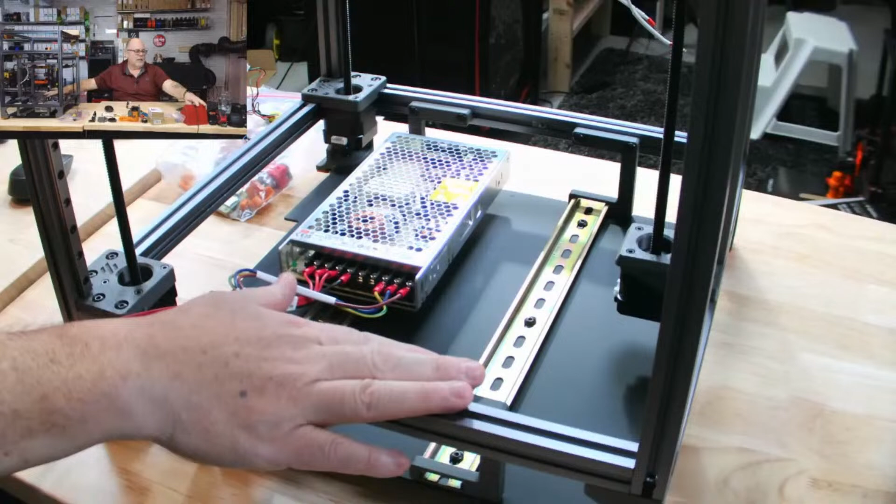Now we have an overhead bench camera that I can actually just reach up and zoom in on a little bit, so this will give us a little better view of what's going on over here. So how this is working is the camera that's up here used to be the camera that's there. The camera that's there used to be the camera that is here. The only camera I haven't changed is my floor camera, which is pointing down at the base of the electronics on the Trident. So there we go.

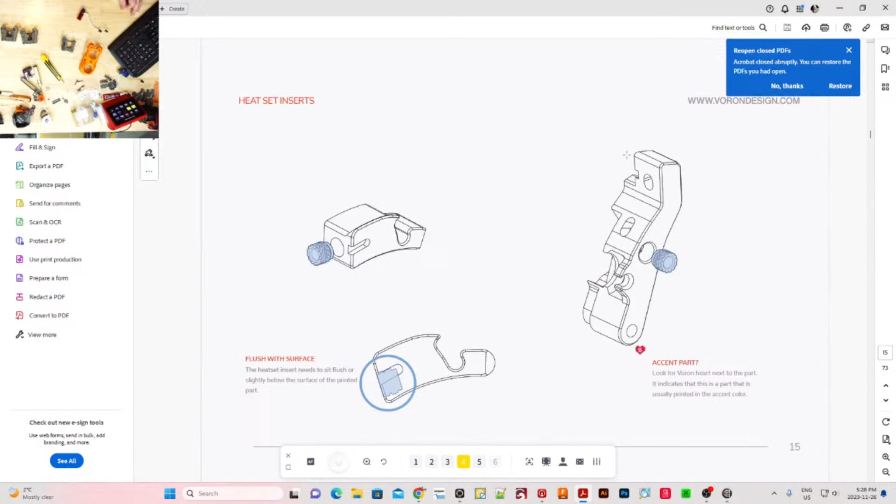So we do have the Stealth Burner. We're going to skip by because we're not doing the Clockwork at all on this. So we're skipping right down to the part where they start talking about the hot end. We are at this stage where we're going to insert those 4 heat set inserts. This is instructions for the Revo, and we're just going to follow along with these as we go.

But now for the easy part, getting this thing warmed up. I don't know how this overhead camera will work showing the heat set inserts.

So these, I don't like these ones. I have 2 different kinds of heat set inserts here, a kind I like and a kind I don't like. I'm hoping I have some of the other ones left. Let's see, are these the right ones? These look like the right ones. Yes, they are. A kind I like and a kind I don't like.

What is a Tri-Zero? Stephen Machado, a Tri-Zero is the Voron 0.1 or 0.2. I'm doing a 0.1 to 0.2 conversion. A Tri-Zero is basically giving it the same bed mechanism as the Trident. You're going to have three Z motors lifting your bed on a Tri-Zero, as opposed to the single one that's on it right now, the single Z.

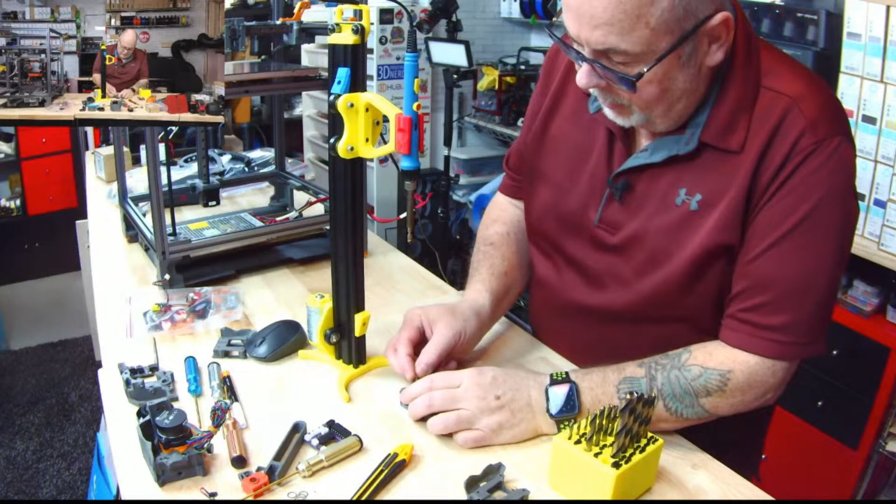You don't see much on that overhead here. So if I were to go like this and angle this down, that's a little better there. That way you can witness if I actually burn myself.

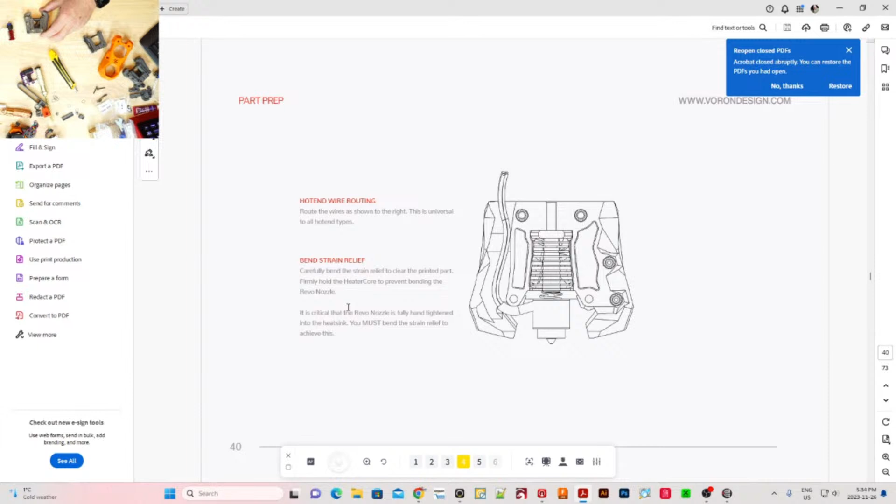And then we put the cap on and screw it in, and then we screw the 4 mounting screws on the top. That's provided we actually have the mounting screws. Okay, so let's go ahead and do this one. Sorry if I'm switching cameras wrong, it's all sort of just... This is all put together and it's all in the heatsink and everything what they want here for a fact.

So what we're going to do is we're going to put it in here and we're going to route the wires up this little groove on the side here and then up this way. Let's bring that little, there we go. So this is going to go in here like so, and then we run the wires just like that. Then we take our other piece.

Is that the right one? Which is the right one? This is the right one. And it covers that just like that.

Oh, that did an ugly job printing that. Okay, that's okay, I won't hold it against it. Little overhang there that the Bambu didn't do. I should have slowed it down for these layers here. So, okay, so there we are. There's the in, like so.

And then we need to take M3x8s. They are also M3x8s. You should be good, that's good. I just need to see it.

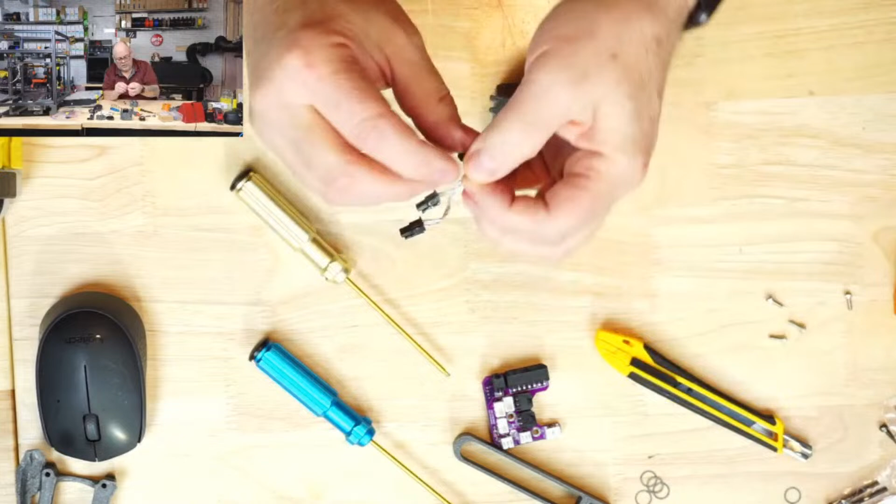Now, ideally, these should be the right size screws to go into the Revo. And I don't think they are. Or we're not lined up. We are lined up, but are these too big or too small? Do these just use basic M3s? Let's just see. Let's see. It does too, it doesn't need these tiny ones.

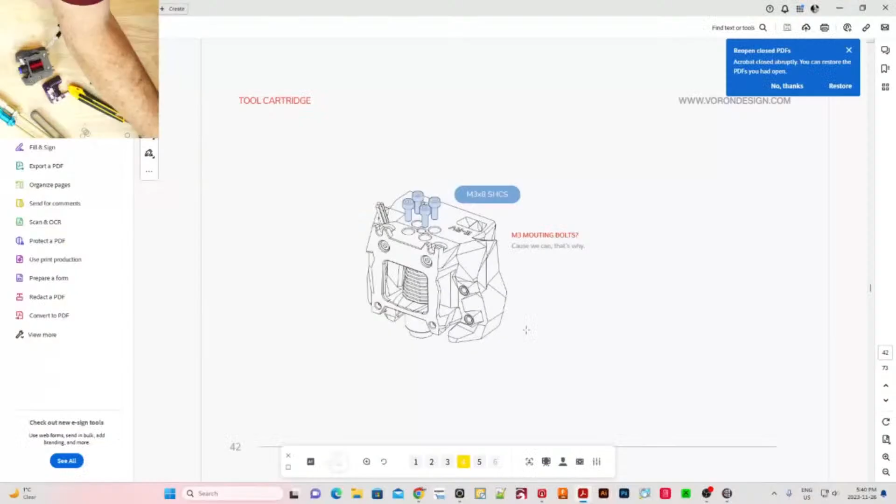Okay, PTFE tube, I got to cut some. We need it to stick out 11. Now, my question is, is this going to be the same for the Galileo 2? It should be, I would imagine it should be. Okay, so we want it to stick out 11 millimeters. Does it say how long for the Clockwork 2?

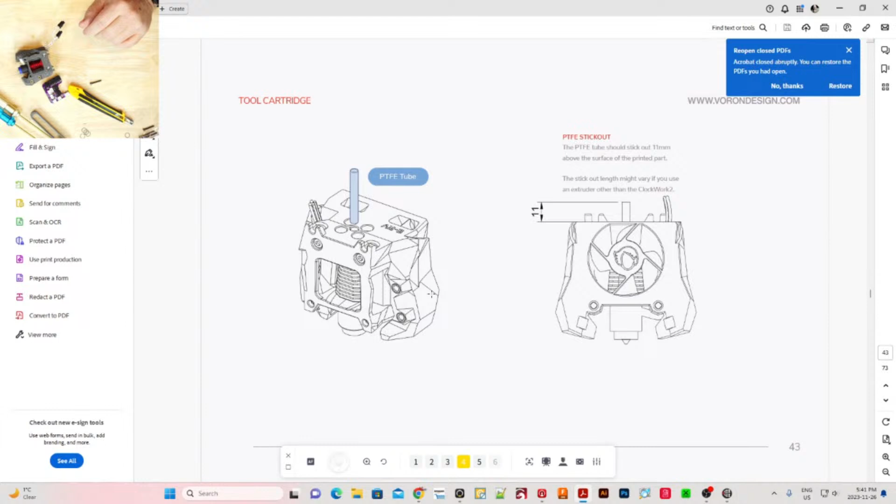It may vary if you use an extruder other than the Clockwork 2, which we are. We're using Galileo 2. Let's go ahead and see how far it's going to stick into the Galileo, and we'll just do the math, and then we'll get back to this part.

Okay, so let's find some PTFE tube, which I believe I have a whole bunch right over here. I saw some yesterday. There's a piece, I see some. Come on, don't be shy. There it is, nice straight piece. And I have no clue, or do I? I do have my PTFE cutter right here. I was gonna say I have no clue where my cutter is, but I found it.

Okay, let's see how far in. Let's get a flat end here if we can. Let's just see if I can. That's nice and flat. See how far in we shove this into the Galileo.

Although we have a little bit of plastic in the way there. I got to drill this out a little bit. Where is my hand tool? There's my hand tool. So put this in here.

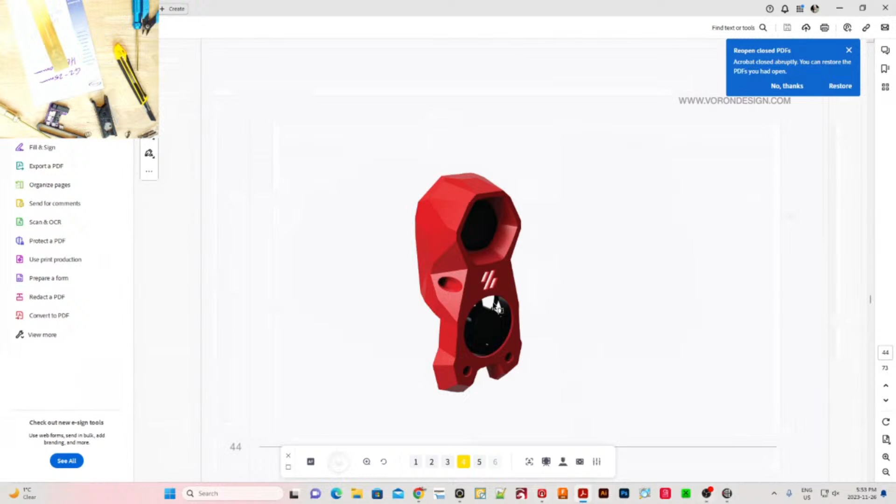Remove support. Oh, all these fun parts right here. Yeah, I think I printed all these things. Let's see. Oh, I don't think I printed the clear parts, but that's okay. I can add those. I think I might actually have the clear lens somewhere.

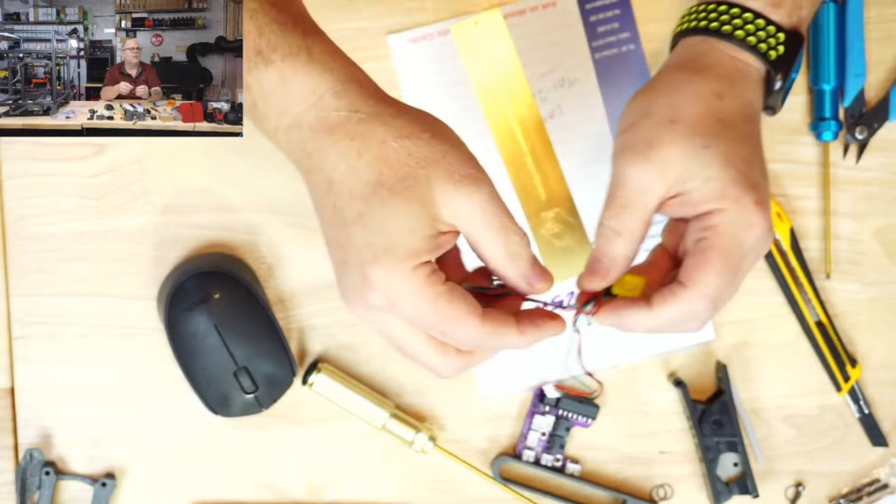Okay, but this is the old one. Let's move this aside. This is the old one. So I got to pop this LED out of here if I can without breaking it.

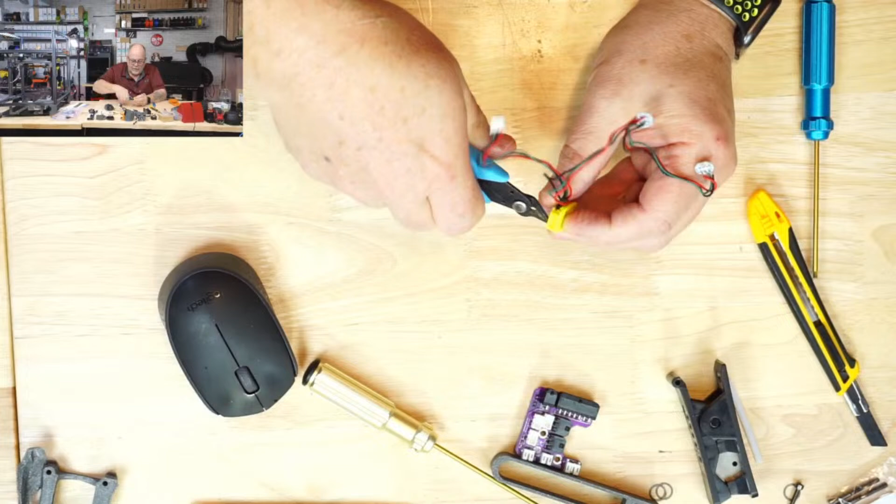Actually, I don't care about breaking the yellow piece, so let's just go ahead and sort of cut this off, because it's a tight fit. There we go.

Really tight fit. That's what she said. Yeah, that's what she said.

I think I got it. I don't want to cut a wire or kill the LED.

Pretty sure I didn't glue that in there. Oh, I just broke a wire. Of course, I just broke a wire. There we go. I just broke the black wire.

Dang, it means I got to solder. Well, at least I got the solder on there. That's okay. I just have to fix that black wire up.

It's called a make work project. Yeah. Make work. Gotta love it, right?

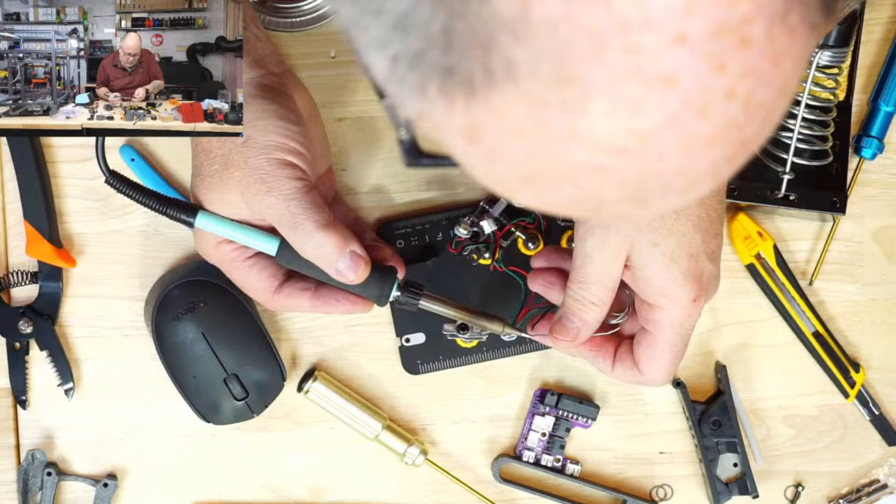At least I see where the black goes. Let's tin that wire a little bit. And let's try and get this to go.

Got it. How does it look? It looks pretty good. Will that focus on that? Autofocus.

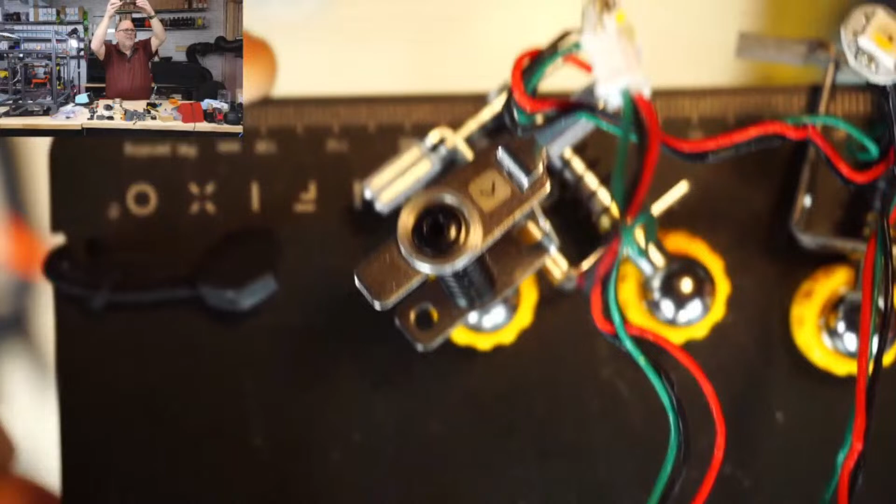Where's the piece that I soldered? Right there, right there. Just soldered that black wire in place. Come on, focus again. Focus.

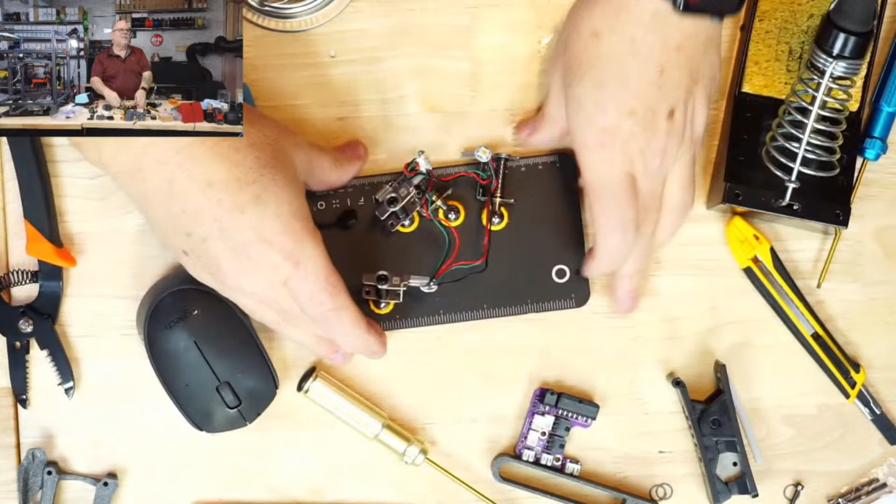There we go, don't worry DWIT, it will be a singe. I mean, a cinch. Ah, good one, Andrew. Where would we be without your humor?

I think we're all okay. The rest of the wires are all fine now. But we're going to leave it. We'll turn the soldering iron off, but we will leave it handy because we all know me.

We'll leave it handy. If you ain't handy, what are you? Something like that, whatever Red Green says. And for all you Americans, you probably don't know who Red Green is.

Okay, so we have our carrier here. I didn't print the clear piece. That's what I didn't print.

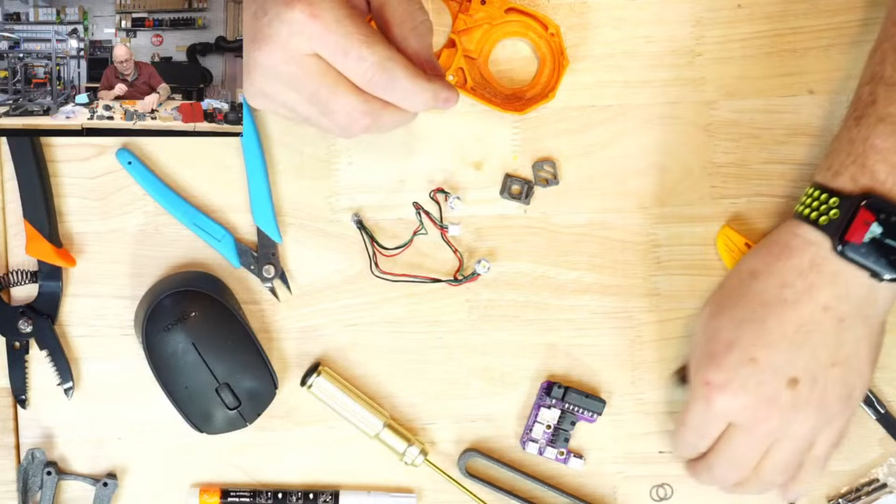Okay, well, I don't know. Maybe we'll do it later.

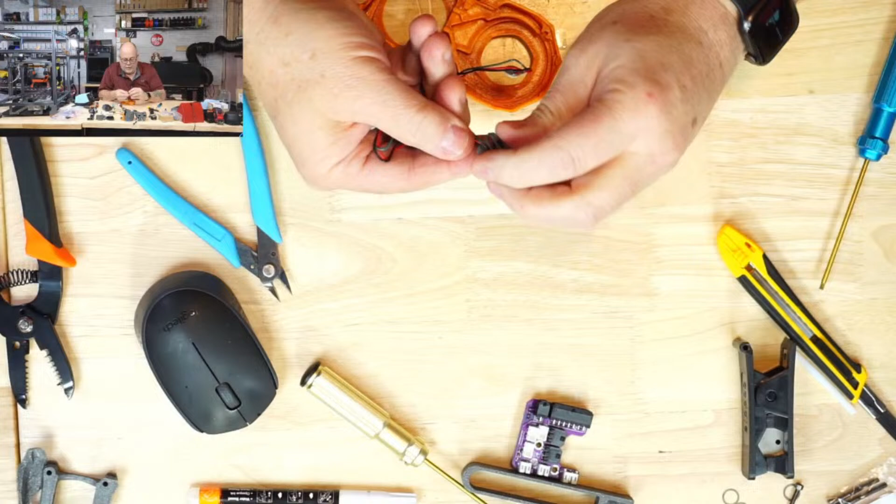That slides in there like so. And we have our carrier and our clear piece is not on there. So I wonder if I have the clear piece from the previous build that I could steal, or did I toss it?

Okay, we'll worry about that in a minute. Let's work on this for now.

Possum Lodge. Possum Lodge, yes. Yes, it is snapshot. That is correct.

Okay. Remove the support, which is, oh, I see. Okay, so the support they want me to remove is this one right here. Right there.

So that we can run wires down the sides of these. There we go. And then the rest of these just snap into place and break as usual. I can't really do this without that clear piece. I can, I'll just take it apart later and build it again if needed. Let's just see how well this is going to sit in here. I have no problem taking it apart, even if I have to print another piece.

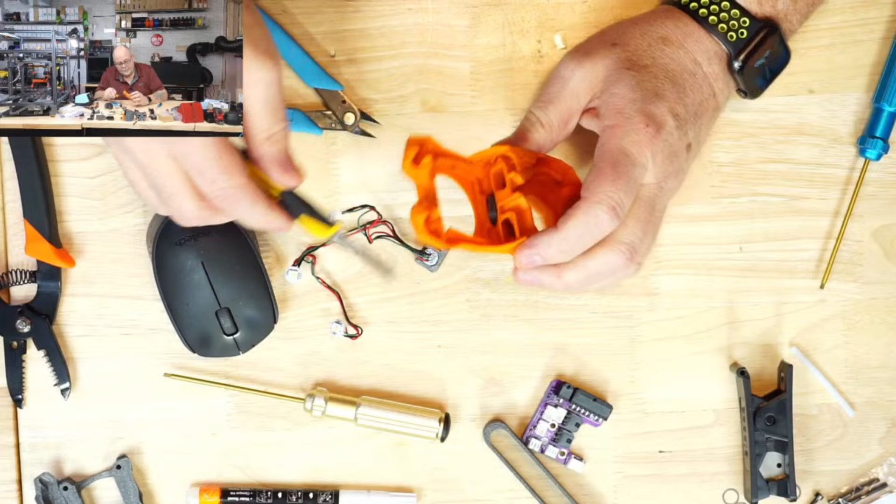Wonder if I can just, for now, put this in. Yeah, and then that'll pop out after, just because I didn't print the clear piece in here yet, and I don't want that to slow my build down. Yes, I'll have to take this apart later to fix it, but big deal. So I don't have the fancy looking lights. It's not the end of the world.

Food container plastic for it. Oh, that would work too. If the women don't find you handsome, they should at least find you handy. Yes. It's rare to get such entertainment.

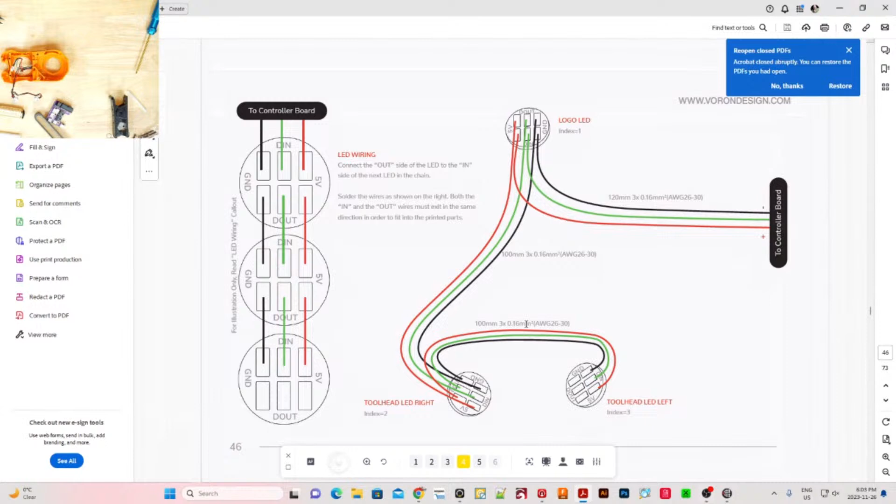It is. Okay, so where we're at is we are at this stage right here. We've already soldered all these because these came off the old one. So we've thrown this in here. We're missing this little clear piece. I can always do that later.

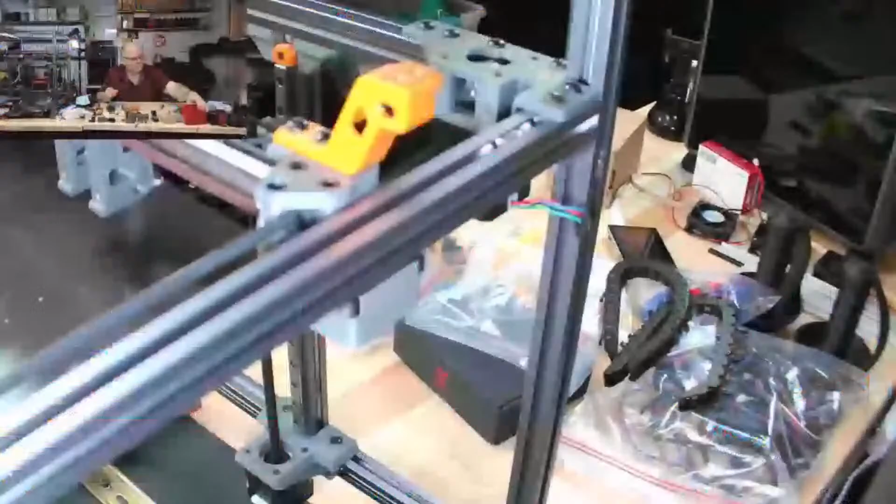Now we're going to load the tool head left and the tool head right. This is just all the wiring routing that we're going to wire up to the top. Okay. Oops, wrong one. Okay, so we got this in. We are going to run tool head left and tool head right. So I believe it is this way over here.

So this plug is going to run. Oops, I got a little support here I got to cut out. There we go. So the power plug is going to run from here through here, up around here, under here, and under the clip. There we go. And then we're going to run—

The LED wires are going to run basically down along here. One LED is going to clip in here. We're going to run the wires along the front, and then the other LED is going to clip in the side. So this could take a little bit of work. For a big-handed guy like me, it takes a little bit of patience and perseverance to get these wires pushed in, and a little help from some tools. Although after doing this a few times, it does become a little bit easier.

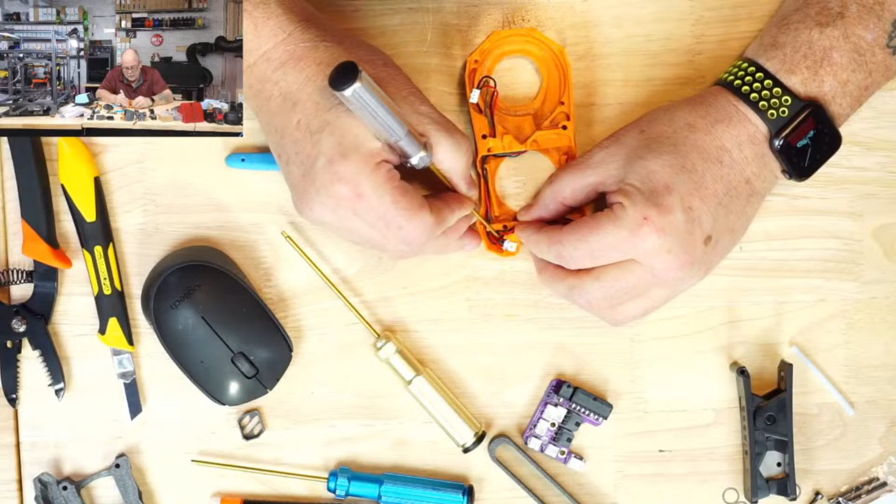There we are, I use a pointy device, but I want to make sure... that one's too thick, that's too thick. But I just want to make sure I don't pinch, bend, or—well, pinching's okay, bending's okay—I don't want to pinch or pierce the wires at all. Okay, we'll tuck these in.

Okay, and we'll route these wires through the wire routing channel. Sounds like a reality channel, right? The wire routing channel. There we go. Black, green, red, and then the wires are a bit long, but I can just tuck them all in underneath here, hopefully.

I'm just trying not to break any solder joints like I did earlier. I do not want to have to solder another wire at this point in time. There we go. I think I successfully did that without breaking any wires.

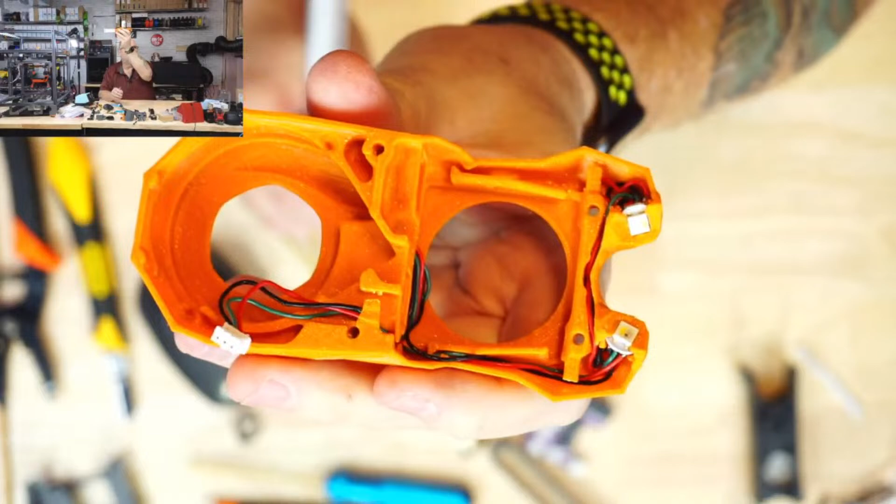Those channels are great, it's great the way they built these channels in. It just takes patience to run the wires and everything down there, and tuck the wires in everywhere so that we don't have trouble when we go to put the hot end on. The only thing is we don't have a clear lens in here, but I'm not worried about that at this point in time. I can fix that later.

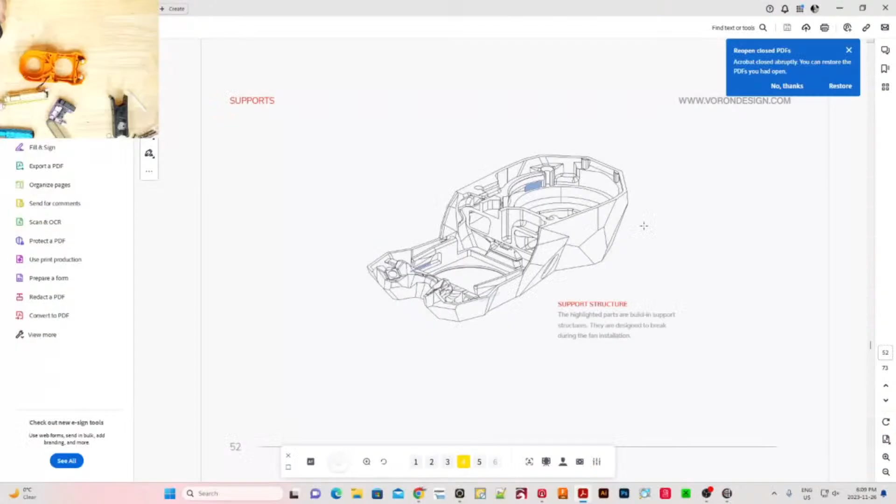LEDs are all in place. So let's go ahead and, where's my mouse? There's my mouse. And we're under this page. The highlighted parts are built-in support structures. They are designed to break during the fan installation. So we're going to install this fan, rotate the fan so the wires exit on the top as the air is pushed inwards.

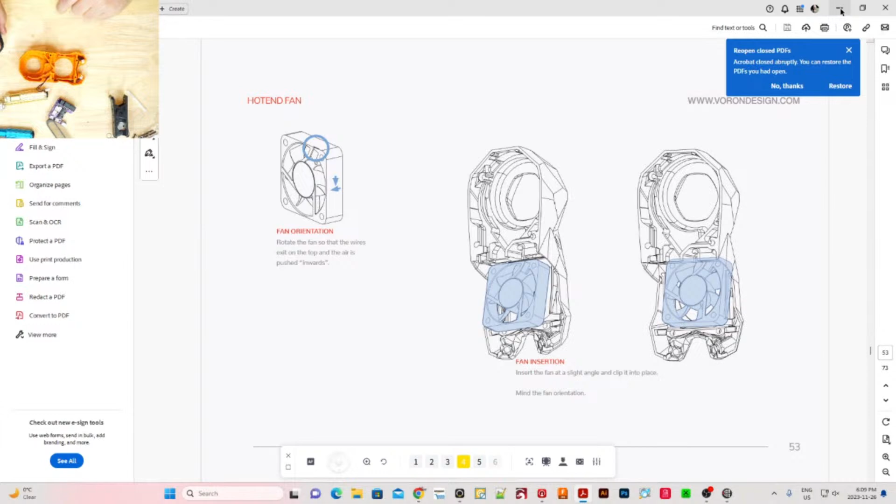Now the fan wires are going to go. Yeah, I'm pretty sure I can figure this out. I think the fan for this, and I couldn't find the fan, but I think I found it, is this one here. I think this is the fan we're looking for right here for the bottom one. Although something tells me it's not, because it was wired.

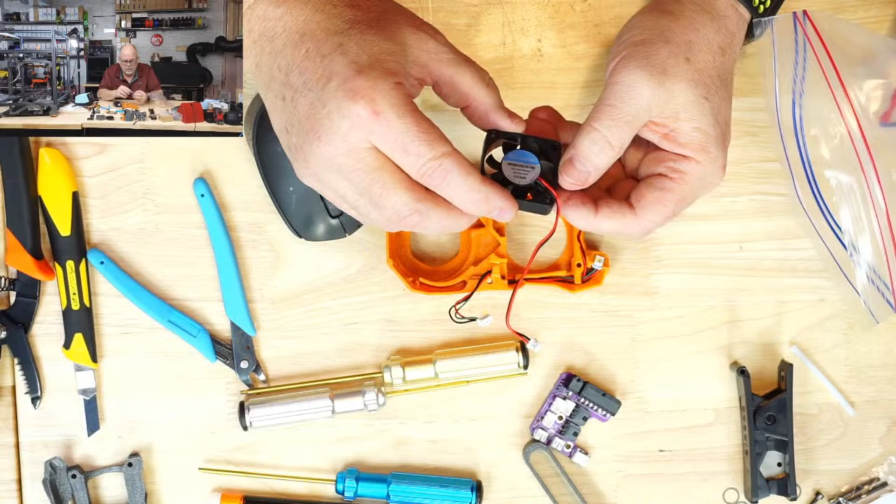This is a 24 volt, which is fine. 24 volt 4010, it's the only one I could find from my old hot end. This, I know this is the top fan, which is no problem. This is definitely the upper one. Yeah, these are right, these are definitely correct.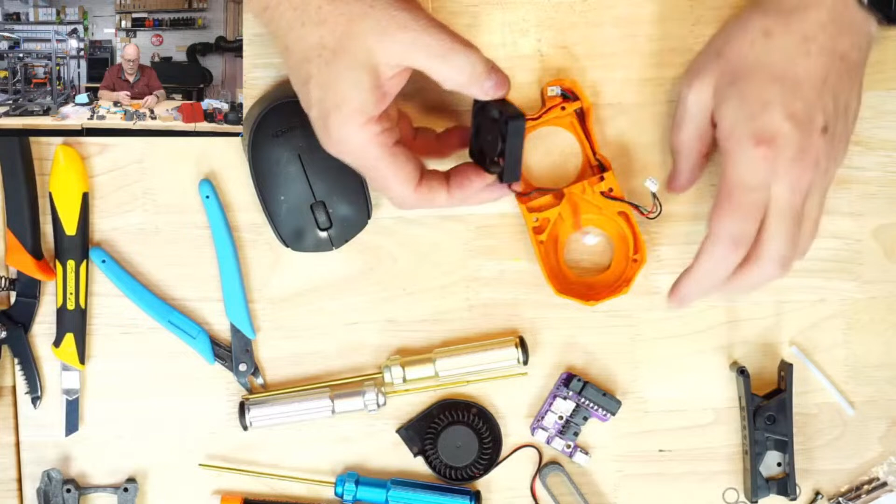So we want the wires coming out this side. The fan is blowing in, so the wires go this way. We want the label of the fan showing. We want the fan blowing in towards the hot end. No, we want the label to be inside, like this. I believe that's the way it is, where the label is, the airflow is towards you where the label is, if I'm not mistaken. Anybody correct me on that? Airflow is this way, comes out with the label.

You bought 37 rolls of filament from Bambu. Oh yeah, that's a great sale, Joe, for sure. That was a great sale they had there.

So I want the wiring coming over this way because it's going to come up through here. So we're going to push this in, like so. I'm positive that the label is the airflow, so that we have just a black fan showing like this. Yeah, because as the fan turns, it's pushing air in.

That makes sense, that makes sense. Yes, thank you, Randy, for sure. Label is in, yeah, I thought so. I always get that confused, the airflow, but yeah, I always remember label. The label blows is what I kind of remind myself.

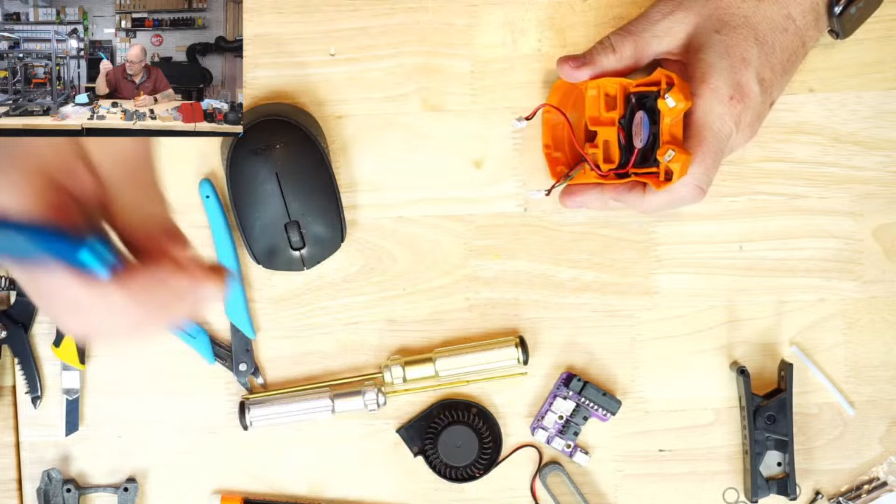Where's my pusher, wire pusher inner? So there we go, feed that over, and under this clip, and there's the fan. I don't think I had the breakout board in this with the plug thing, so I'm not gonna worry about that for this build. Because I honestly don't think that the Galileo 2 has the room, let me actually open this up.

I don't think the Galileo 2 has the room, or does it? Oh yeah, it does have the room for the board. I don't know, where's my board? Where's the one board that I was using? It was this one. And this went, yeah, I don't think this is designed for it. Or is it? Oh, that might be designed to take this board. So maybe I'll just do that. Yeah, okay, so putting this board in, I just have to remove this screw and put the other one in.

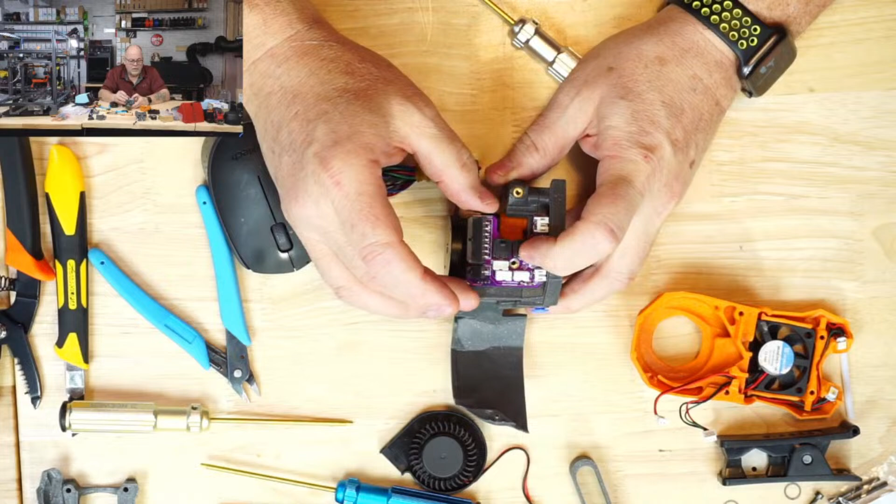Yeah, maybe I will use this board. Actually, no, that's not, I'm thinking of this one. This is the one I'm thinking of here. So where this would go in here, however that goes in here, and then this guy mounts on here, like so. I wonder if that would work with this. And then that way, when we unplug the... No, I think I'm just going to go the old-fashioned way for now, because that means I'd have to unplug and solder my fan wires to this guy.

So I think I'll just go the old-fashioned way, and we'll go ahead and use the board that came out of it, which was this guy here, where we're just plugging all our fans in. But I just got to remember what is what: part cooling fan, hot end fan, and then this is going to be the LEDs. Yeah, okay, I think that's what we'll do.

The board fits, that's why it took so long to design. Oh, I see, okay. Oh, the other screw comes out, it was just designed to hold the thing temporarily. Oh, okay, I see, I was wondering why that was in there. So yeah, this other screw right here comes out, and then that's where the board is going to sit right here. That makes sense.

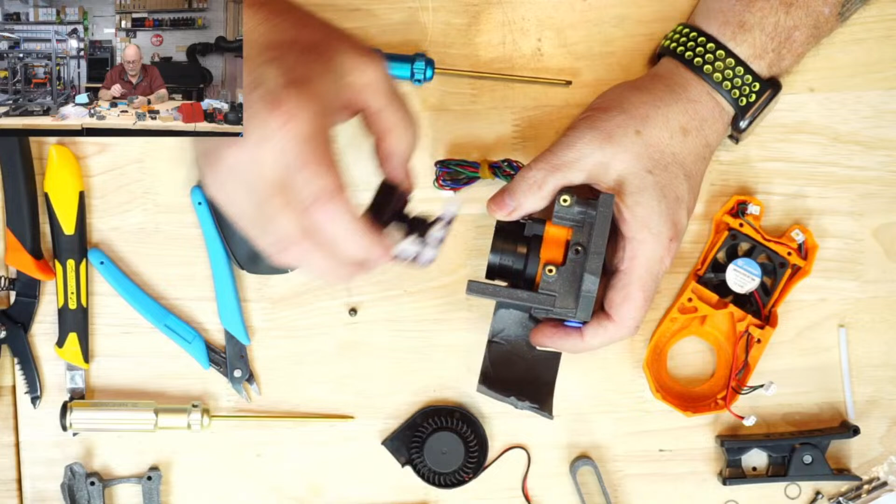So we'll keep that screw, we'll use an M3x8 here. And so this board can come on and go like so. Okay, we just need to remember that hot end fan and part cooling fan is the top one. I get the two mixed up. So we can put this one back in.

Okay, do I need a spacer under that one? No, I should be okay. Oh, they've designed that nicely. It's a tight fit to put the plugs in here, but still, it should work.

Looks like it will take the Revo connectors too. I believe it does, down here and here, the two Revo connectors. Let's see. Yes, it does. This takes the Revo connectors here and here. It's hard to see them in the camera, but they're the black plugs here.

I need to figure out which is hot end, which is the thermistor and which is the heater on that. Okay, so we have thermistor and heater, I can read them right here. And then the other ones, we have a probe, so that's going to be for our probe. And then we have our LED and then our bundle, our bundle is going to go here. Okay, I think we're good.

I'm winging this without instructions a lot for some of the electrics, but going from a little bit of history of doing this, I guess.

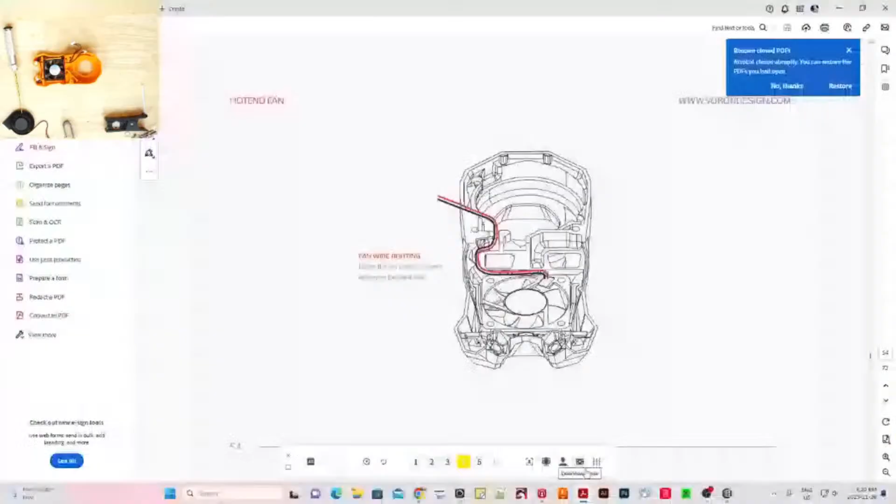Next step. We've done that, we've done all that. And we're going to use those M3x6s. Okay, just to put that fan in. Okay, so we're getting to a point now where we can do stuff.

So this one goes in like so. This snaps in here, like that. Okay, turns freely. And then we're going to use our, what just fell?

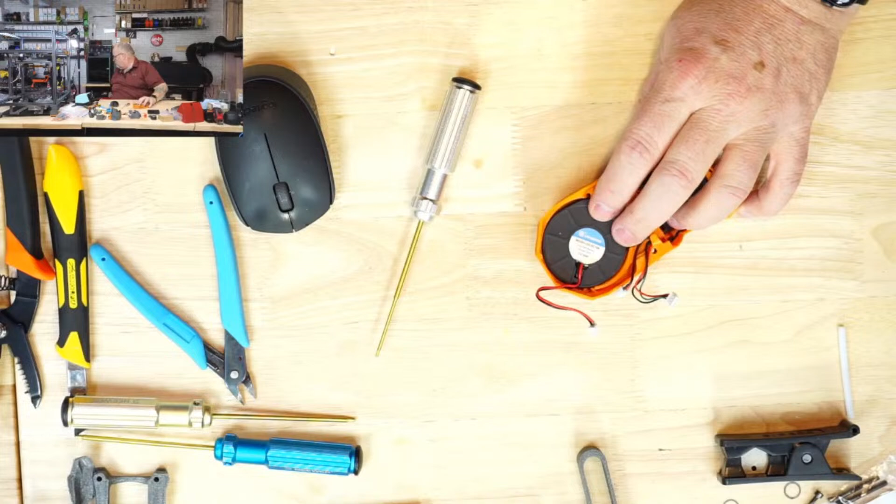Oh, just my paper towel. Then we have a couple M3x6s here somewhere, right here. Let's secure that fan in place.

Do not spindle, fold, or mutilate. Spend, bend, fold, or mutilate. Bend, fold, or mutilate.

Okay, where's our sixes? There's our, and these just screw into thread into the plastic, and these are just to hold the fan in place. There we go.

Okay. Okie doke. Stealthburner, check.

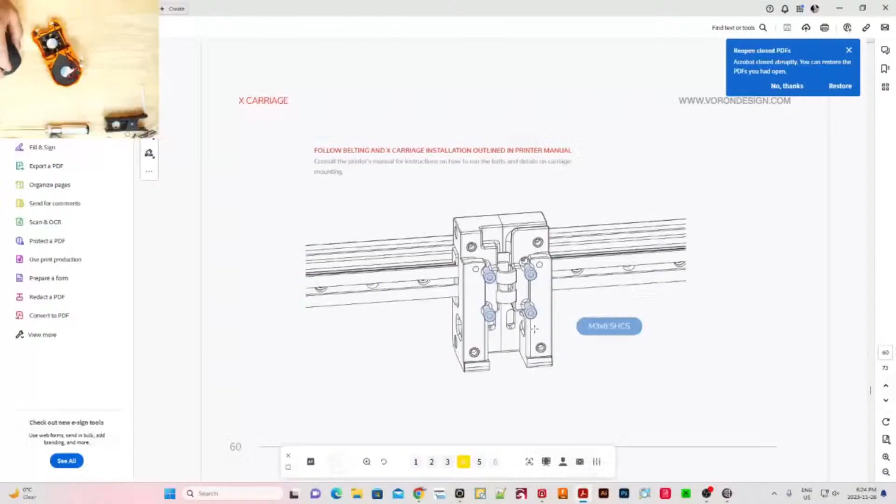Okay, we've basically done the rest of it. We've already got that mounted to the X carriage. We're not worrying about that probe for now. We can actually assemble this. We're going to be putting a... I don't have my ADXL. Do I have an ADXL for this? That's what I got to figure out.

I'm going to be putting, I think, a clicky probe on this. I haven't decided. I'm thinking of ordering the beacon, but I really haven't decided as far as what kind of probe I want to put on this thing yet. So, yeah.

You're being foolish. You have thermal filament that gets blue when it warms up to print your parts. Oh, very cool. Why would that be foolish? That sounds kind of cool.

Okay, so we are gonna. I'm not gonna worry about the probe at this point in time. Although I do have the clicky probe, but I gotta reprint the parts for it because they're in the wrong color. I don't even know where I put them. Is this it here? Yeah, this is the clicky probe here. But they are printed in the incorrect colors.

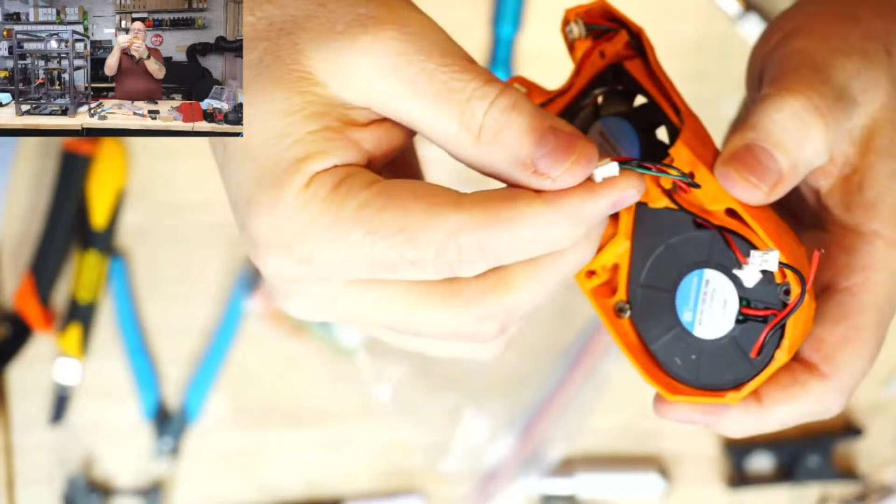So of course I've got a broken wire right here that I've got to fix, and this one here. Let's make sure the other ones aren't. Yeah, they're okay. Gotta fix a broken wire. Good thing this is nice and long because I got lots of wire to play with here.

Do I have any more of these plugs? That just came right out, just came right uncrimped. Well, we'll just break that right off. Pretty sure I have some of those. I'm pretty sure that's these here. Always something, right? No, that's not these. These are smaller, dang.

No, these are the smaller ones. Do I have any? Let's hope I have some. I have a bit of everything, but let's see what else do I have. Can't steal one off of that. I'm pretty sure I have some more fans over here I could probably steal a plug from.

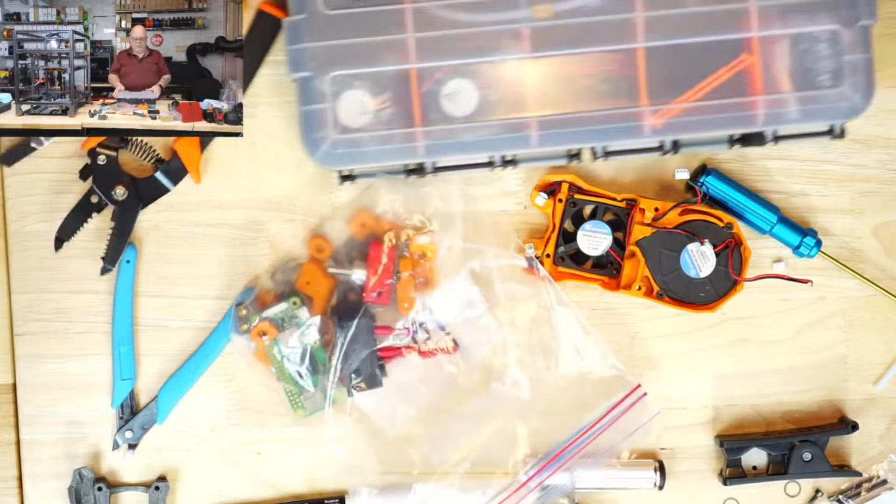I have one more place to look. Yeah, the PH, they're tiny. They are tiny, I have enough trouble with the regular ones. I have some Prusa parts in here. I've got a whole bunch of parts in here, and I have some fans.

So let's see if any of these fans. No, see, these are all using the XH. I have a fan, there's another fan with no plug. There's a Prusa fan with a custom plug. There's another Prusa fan with a custom plug. Man. Another fan with no plug, nope.

Dang, what's this fan? No plug. Okay, well, and nothing over there. BL Touch, spacers, and nothing in there. Dang. Dag nabbit.

Make mine look like kids' hands. Yeah, and these are big hands too.

Okay, well, there is one possibility. Where did I put the plug? Although my little connectors won't fit in that, will they? No, don't tell me I lost that little piece already. But I got to order some anyways.

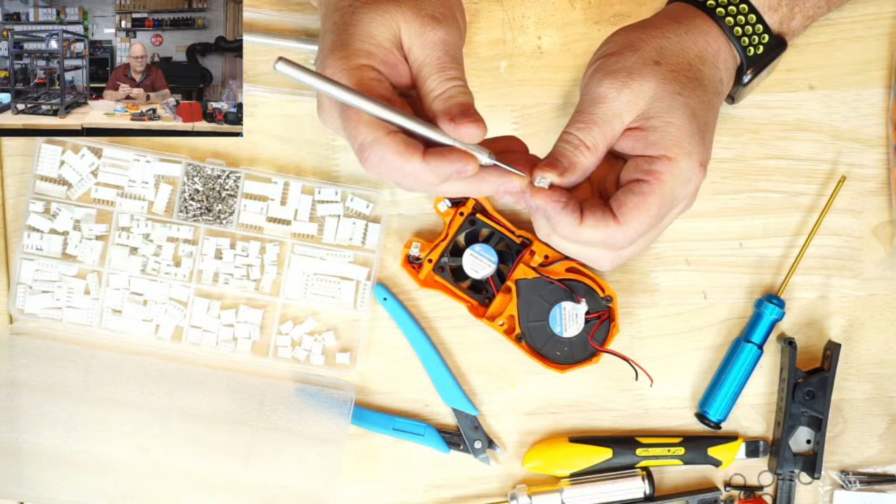So let's grab our little precision tiny tool, and whoever's on, it's another chance for me to cut myself. You might see some blood here, but see if I can get these out. They are different. I'll pop this one out and see.

Okay, oh just about had it out. There it is. And it almost... yeah, I think it's a little bit smaller. I think you're right, I think it's smaller, because let's just see if this pin would fit in here. And that would have to go in that way. Yeah, it's too big. Okay, yeah, it's a different size pin. Definitely a different size pin. Yeah, that will not go in there.

Okay, so I will just have to order some more of a kit of these parts. They're easy enough to get out to salvage the plug, but yeah, the pins are definitely smaller. Holy crap, they're tiny, I'm going to have fun crimping these. Okay. Yeah. We'll have to order a set of those.